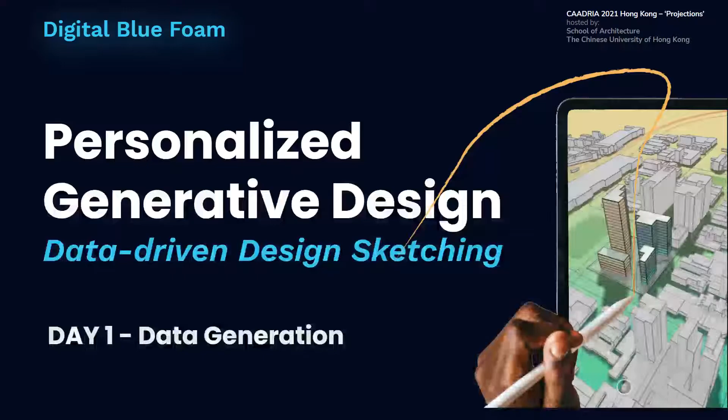We're the team from Digital Blue Foam, an AEC startup. We're developing an online platform to do design, looking at the early stage, and also how we can bring in more data to inform the design process to improve the quality of the built environment. We've been working on this company for about 4 years, and we're really excited to get the chance to do our first public workshop at CAADRIA this year. So this is a big moment for us.

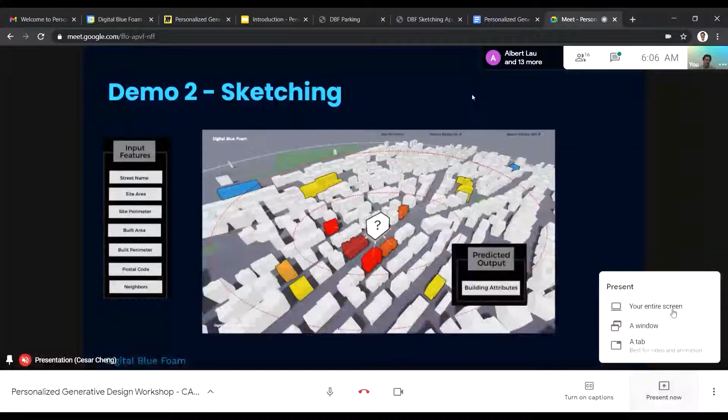Great. Maybe, okay, so I think now, Rutvik, yeah, it's a good time to go through the demonstration, right? Yeah, so just to set up the next part. So Rutvik, you're going to do the demonstration.

Yeah, so basically we have two workflows. One is a Grasshopper workflow, and the other is using a sketching app to generate visual data. So you can choose based on what project you want to work on. You can choose one of the two, but we'll show both how they work now, and we'll provide all the files so you guys can use that as a starting point and adapt. So once we show the demonstration, we'll come up with the project ideas.

Okay, so first I'll begin with the manual data generation. We have created a customized application for this workshop. We have been working on this application in our research and development teams too. So what does this application do?

Cesar, okay, go ahead. Maybe Cesar, stop presenting your screen. Yeah, okay, okay, so yeah.

This is the sketching application. The background is an 815 by 815 pixelated map, which is randomly generated. You're not going to be given the information of where this map is based on or what the neighboring buildings' programs are.

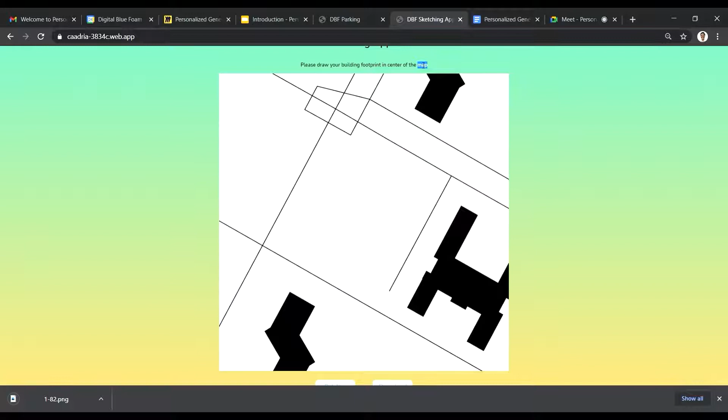So this will be my school, and I download it. You need to create 3 folders on your local machine: residence, school, and commercial building. Whenever you download this PNG, you put the image files in the specified class folder which you have drawn, and make sure you draw as many footprints as you can, but the minimum aim should be at least 50 images for each class.

It's always said that the more data you have, the better the model gets trained. More data, more efficient the results. So for you to get personalized results, you need personalized data.

So just taking a step back, what is the type of machine learning problem we're working on here? We are working on the image classification algorithm. The machine recognizes the patterns in the images. It's not given anything other than the labels, like school, residence, and commercial buildings, along with the image.

So for image classification, if I have a different idea, say I don't want to do building footprints, can I work on that? Or do I have to use this application? As I said, the basic approach I'll explain is through the building footprints.

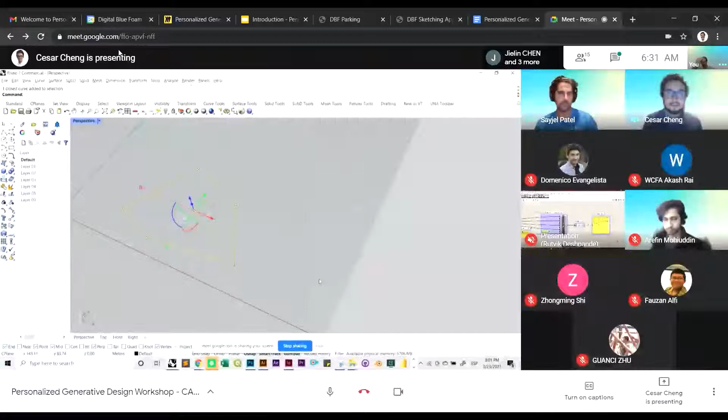So this was based on the same case study I showed earlier. Essentially what this generator does is take any outline that you can draw and solve a parking layout within it. You can modify the outline and get an updated version of the parking layout.

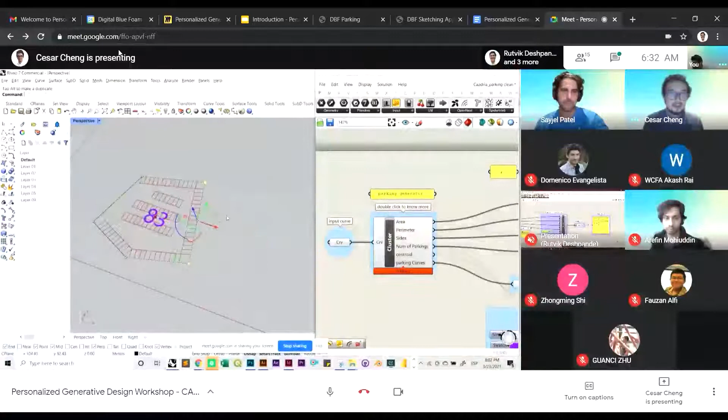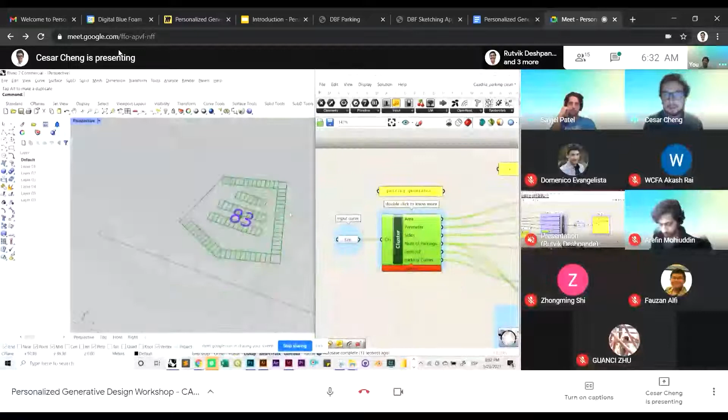This is set up similarly to the example Rutvik just showed. If you double click on this cluster, you get access to how the definition was constructed, and you can look in detail at what's happening to generate the parking layout. Basically any Grasshopper script with a clear input and one clear output works—in this case, the building footprint and the number of parking slots generated for each iteration.

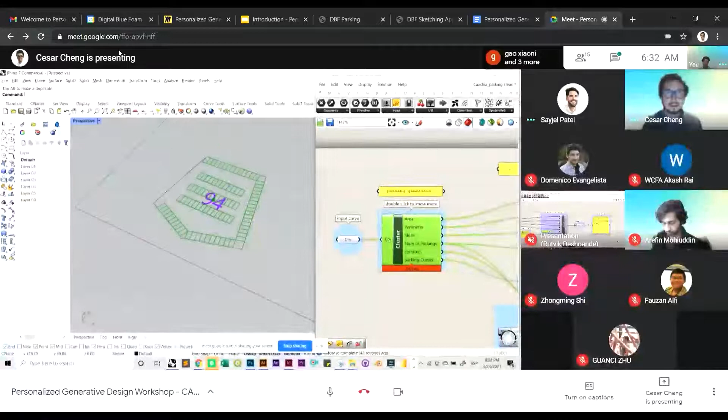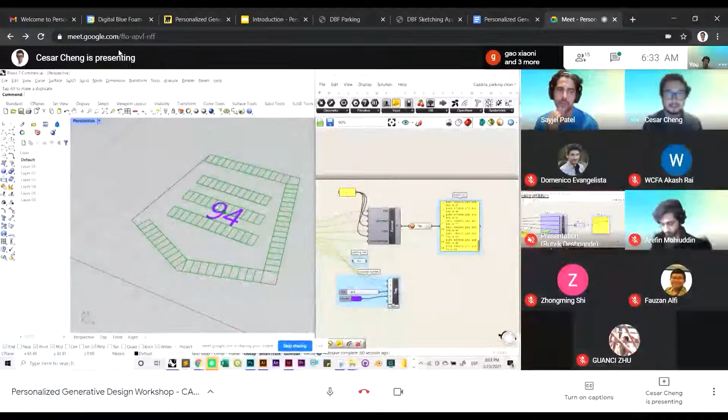So here we have the clear input, which is any line I draw to launch the generator, and the numbers that change as the footprint changes. Essentially, up to here is where most Grasshopper definitions end. What we're trying to do is capture this data and store it in a way we can use to train machine learning models, and then share this information with people who may not have the ability or expertise to create these generators in Grasshopper.

Do I have to manually change the shapes to get this? No. So how can I automate this?

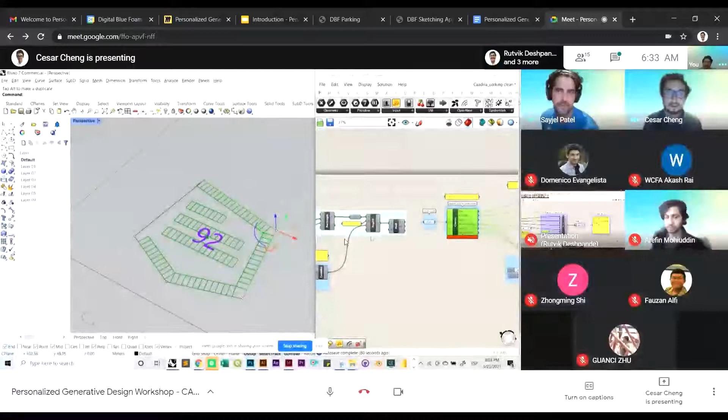One way to generate this would be to draw, similar to the sketching app, thousands of different layouts or outlines until you've recorded enough data samples. But we've also provided a random generator—you can simply connect these points to the curve instead of inputting your own curve, which generates random points and creates polygons out of them.

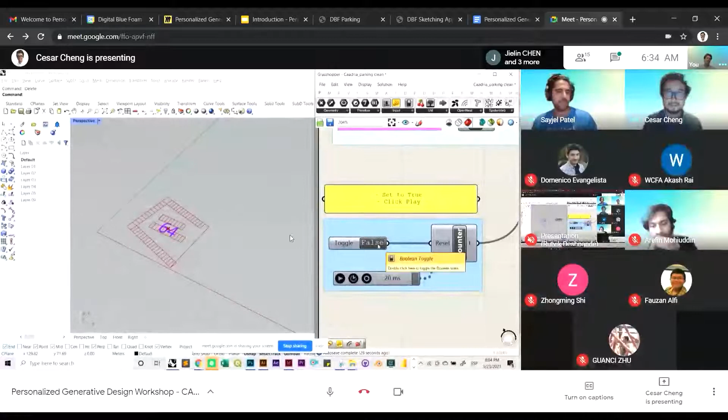There's another component for this—you need Kangaroo installed, but for later versions of Grasshopper this comes included already, unless you have something before Rhino 6. For Rhino 5, you'd have to download the plugin. You simply trigger this, set it to true, and trigger the counter.

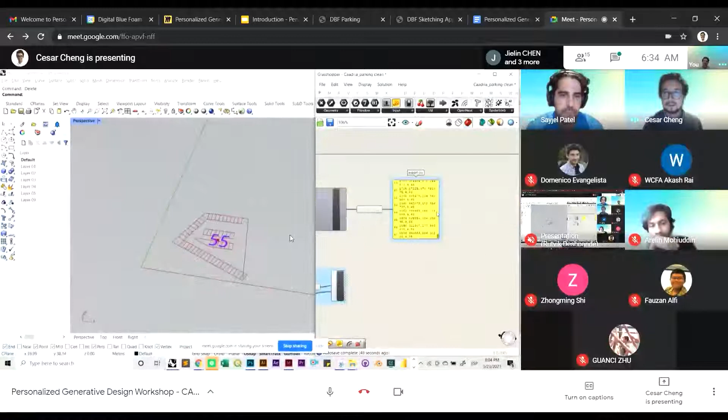And then the random points start generating different layouts for you. As that happens, you start recording all this data that you'll later use for training the model.

I guess this could be anything—you could build an algorithm that calculates or estimates how many seats in a restaurant can fit in a given space, how much shelving space in a commercial supermarket, or how many units in an apartment building.

From the previous example of the daylight study, I saw that you were making all the permutations, all the combinations of the input—in the CSV you were generating all the possible combinations, correct? I tried something similar using a genetic algorithm like Galapagos, but it wasn't doing all the combinations possible. So what did you implement to get all the possible combinations of all the sliders you created?

Okay, so I think you can still see my screen, right? Yeah, yeah.

Whatever input parameters you have—say for now I had the X, Y, and Z of the room, so geometric dimensions—I connected all these parameters to a... just wait.